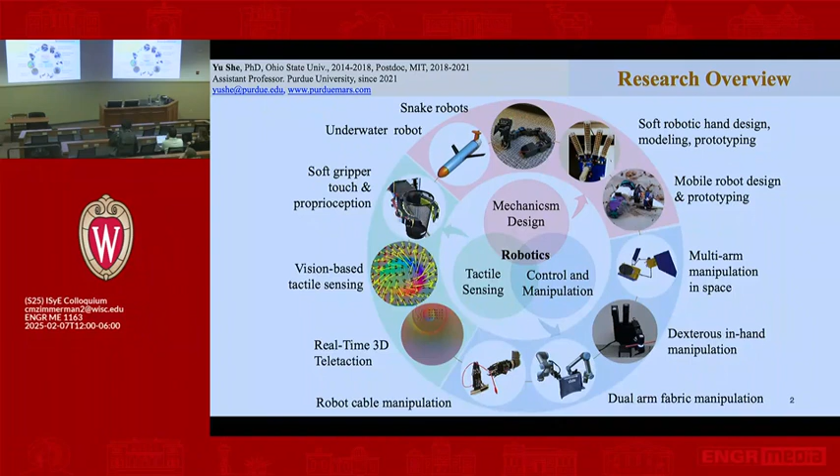The second direction is about tactile sensing. I'm going to introduce a very unique tactile sensor, quite different from traditional tactile sensors. It can generate very rich feedback from interactions with the environment. The last one: once we have the hardware design and the feedback, we can design controllers, motion planning, or machine learning policies for grasping and manipulation.

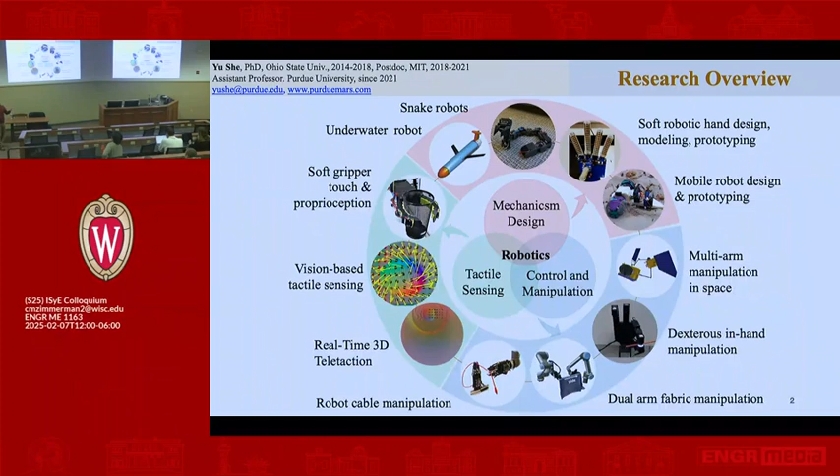So those are the three major research areas. Today I'm going to mostly focus on the second and the third one - tactile sensing and control for manipulation. It may be slightly different from traditional industrial engineering optimization, but it will be close to manufacturing or human factors for human-robot collaboration. So that's the high-level introduction.

You see all these industrial robots widely used to build cars like Tesla, even more than 10 years ago. They're fast, they can do repetitive tasks very efficiently. You see this everywhere. However, if you take a look at your home, we don't have too much robots there. You see robots doing floor cleaning, robots for the backyard doing grass mowing, and that's maybe the robots you see in daily life. It's not like an industrial manufacturing floor doing assembly everywhere, right?

So people work in this direction - we try to have robot assistants, robot waiters, home robots to help us. For example, I wish we had robots to help us do the laundry, prepare breakfast, lunch, do the housework. But we are not there yet. People work in this direction. Why are we not there? One major limitation or critical component we lack is this.

I'm thinking about robotic manipulation, because when we say we want robots in our daily life doing laundry, doing housework, there's a lot of physical interaction between the robotic hand and the environment for grasping, for control. That's something very different from the traditional setting of industrial robots. In the traditional setting, everything is known, you have a structured environment, and you know the components, objects, dimensions, and positions. But in daily life, all these things we don't know.

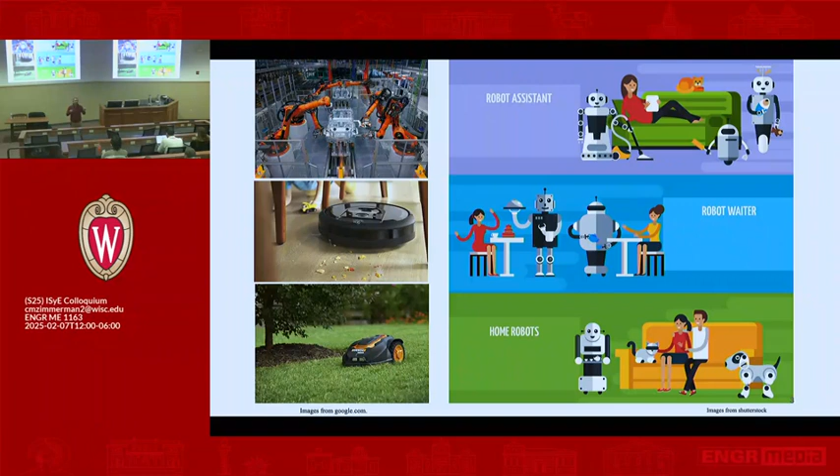There's a lot of dynamics and potentially soft material. In industrial robots, all the components are rigid, right? But in daily life we have deformable objects, like food, even just making breakfast. So all these things create these challenges. We think manipulation is one of the key bottlenecks to applying robots in daily life. Within this area, robotic manipulation, we think tactile sensing is critical because any manipulation task must have physical interaction between the robotic finger and the objects. So that's where we focus - my lab focuses on tactile sensing and robotic manipulation.

Here is an early demonstration from pioneer Johansson. This is a demo to show how tactile sensing is important. The participant on the left, everything is normal.

She can do this task, lighting a match, in a few seconds. On the right side, the same participant, same task, but now her hand and fingers get anesthesia. It's numb, she has no tactile feeling in her fingers. Eventually she still makes it, but it takes much longer, more than 30 seconds, to do the same task.

So we just want to show tactile sensing is really important in daily manipulation tasks. For example, tying your shoelace, buttoning your shirt, folding your clothes, doing a zip lock, making breakfast, or doing assembly tasks. All these things we need tactile sensing for.

And of course, people working in this field for a long time, these traditional tactile sensors have made significant progress in the past, say, 20 years. Piezo-based, capacitive-based, resistive-based tactile sensors - they're great, they've made big progress in the past decades. But they have some limitations as well.

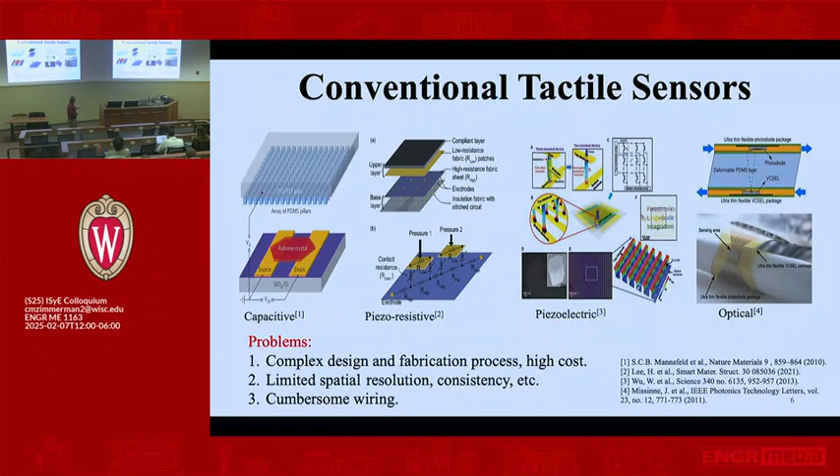They have a complex design for the fabrication process. They have limited spatial resolution. And you can imagine if you want, say, a 10 by 10 matrix, how many cables you need, right? You have a cumbersome wiring problem. So that's one kind of tactile sensor.

That's not the only category of tactile sensor. There's also what's called a vision-based tactile sensor. They are quite different from traditional tactile sensors. The idea is you have an embedded camera within the sensor. From the next slide, I'm going to explain how it works - it's quite different from traditional tactile sensors.

So first, we get a clear elastomer, silicone, and then we coat a reflective ink on the surface. It's just coating. Then if you press objects on the surface, it's going to deform the gel. And if you assemble the gel and the coating onto the robotic fingers, just assembling these components onto the fingers, it becomes a tactile sensor.

So that is how this vision-based tactile sensor works. Now, because we have embedded the camera within these sensors, we can tell the raw data from the image. You can imagine the difference, how rich the information we can get from this vision-based tactile sensor compared to traditional tactile sensors, which are resistive or capacitive-based and give you maybe one dimension or a few dimensions of data.

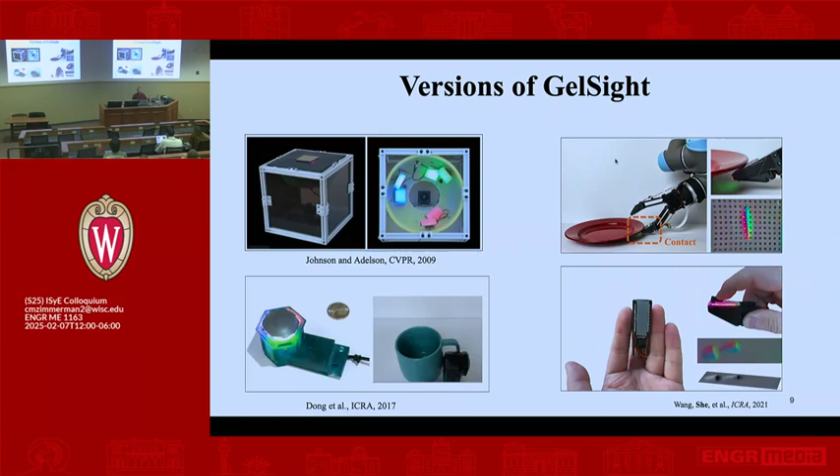Later on, my colleague Siyuan Dong made a smaller version. With this version, for the first time, they tried to install the sensor on the end effector of a robotic arm for grasping and manipulation. Still, it was kind of bulky and couldn't access small spaces. Then later I joined the team and we made it even smaller, finger-sized, and wedge-shaped, so it could access confined spaces - more appropriate for grasping and manipulation in a robotic system.

Now I just want to give you a visualization of what kind of tactile data we can get. Later on, I'm going to show you how we can use this tactile data for grasping and manipulation.

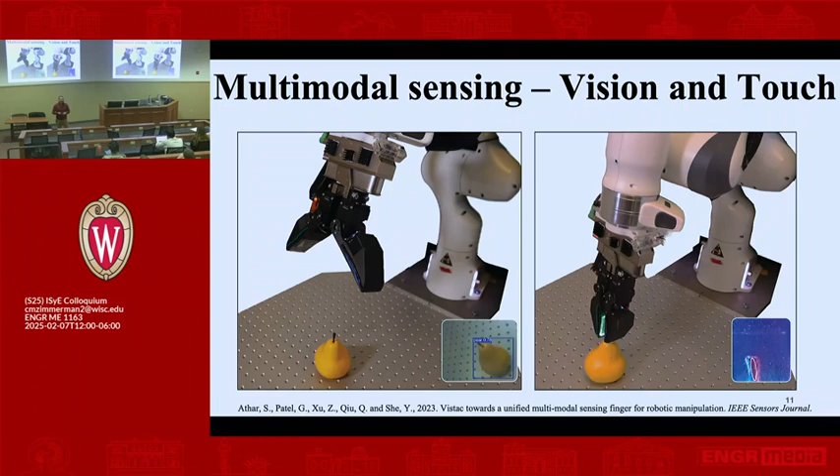We used something simple, the one-way window glass principle: the bright side acts as a mirror, and the dark side acts as a normal transparent window. In the daytime, the outside is lighter and the inside of the sensor is darker, so if you stand outside, you see the window like a mirror reflection. But if you stand inside, you see through it. In the evening it's vice versa. So basically you can change the lighting condition to change the mode, either tactile or vision. That's how we achieved this functionality.

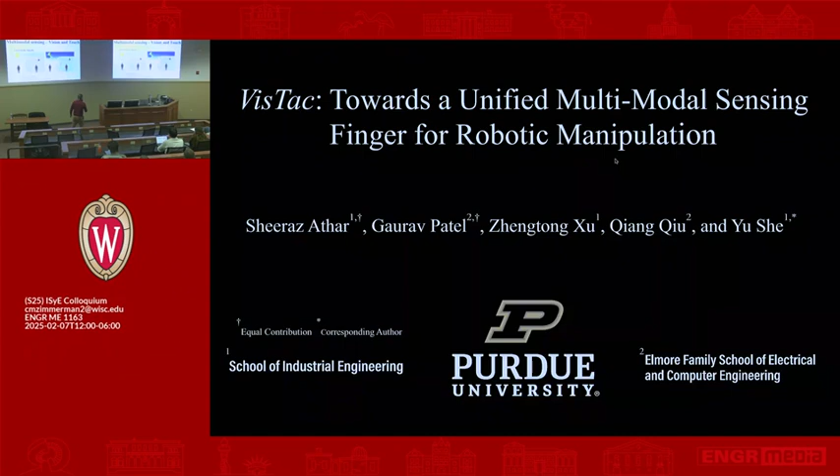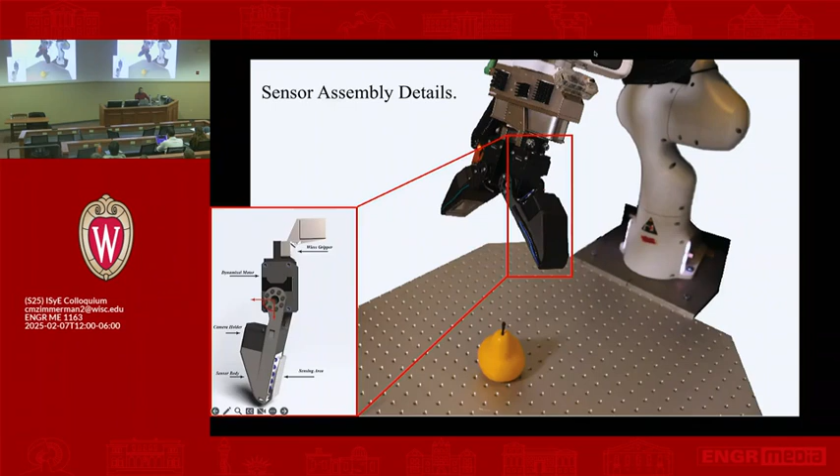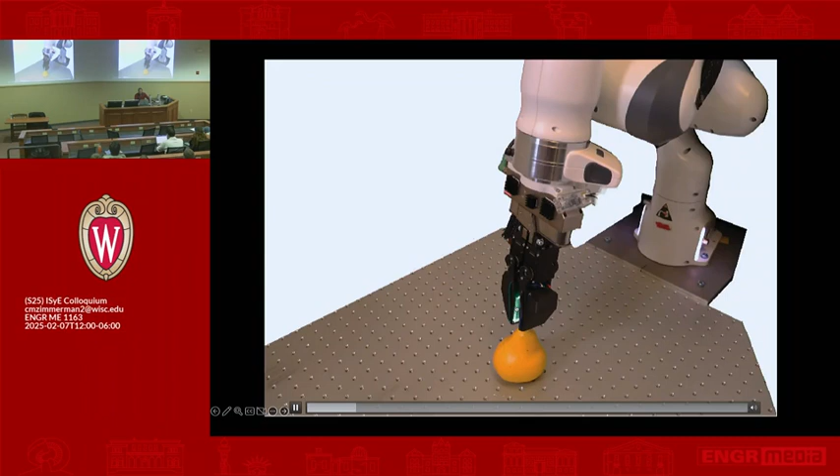I'll show a very quick demo here. We turn off the light, so the outside lighting is stronger than inside, and it's a vision modality, as you just saw. Now we change the lighting condition and turn the lights on. Now it becomes a tactile modality. So we just need to simply change the lighting condition to get either tactile or vision.

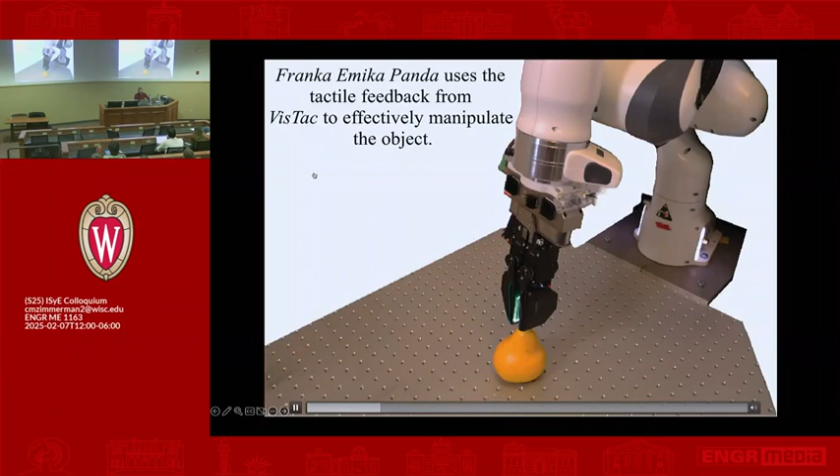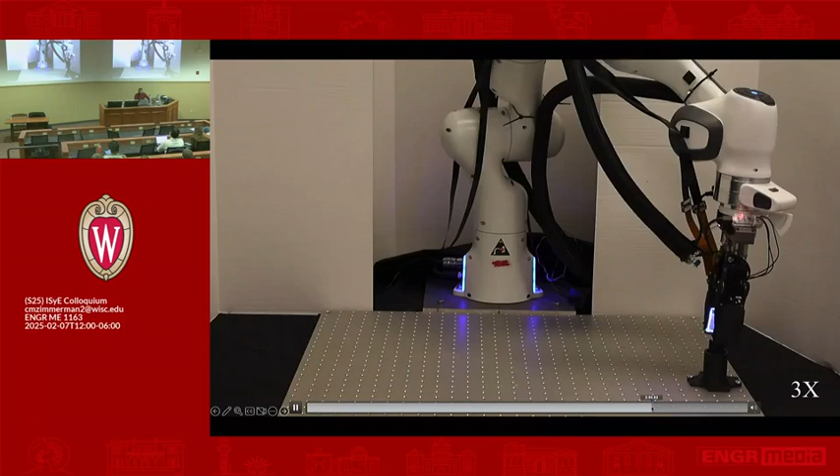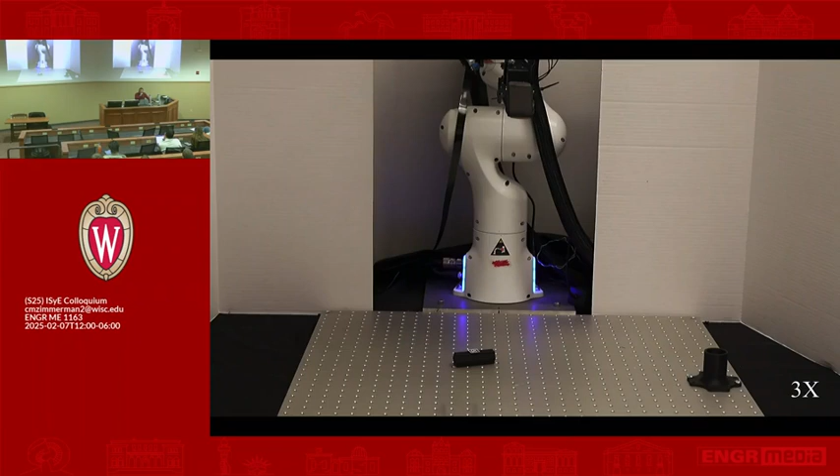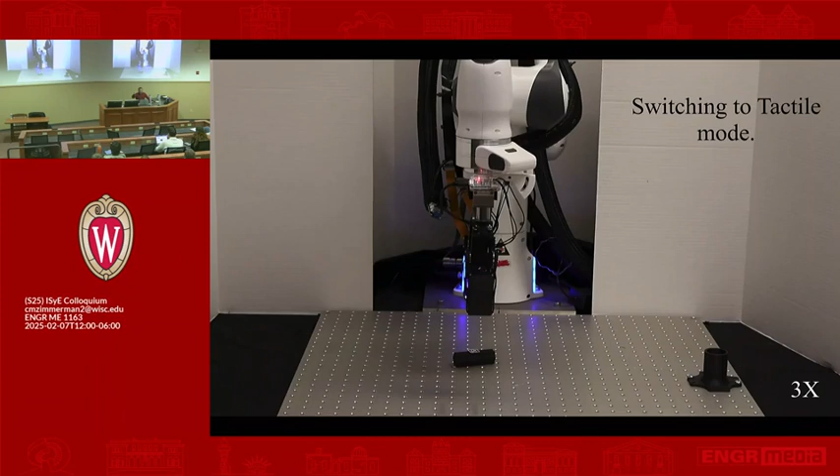Later on we have some demos to show some tasks where we use both tactile and vision to finish them. This is a peg-in-hole demonstration. We first use vision to identify the position and orientation of the objects on the table, and then we grasp the objects using vision modality to identify the object's position and orientation. Once we grasp the object in the hand, we switch to tactile modality, because tactile modality can tell you very precise orientation of the object in the finger, and then you can do the peg-in-hole insertion using this tactile feedback. That's one of the demos we showed earlier, combining both tactile and vision.

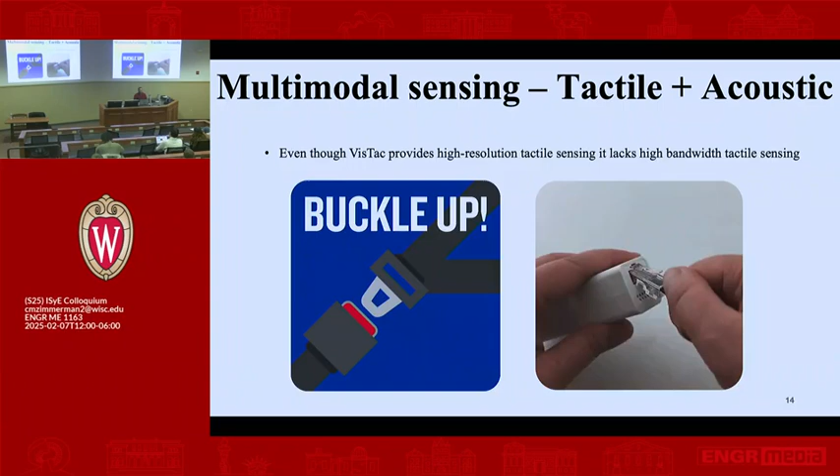This is the latest sensor we made. On the left side is still the traditional vision-based tactile sensor I showed you earlier — you press a key and see the tactile imprints. On the right side, we show the new added acoustic feedback. Basically we add an accelerometer and microphone on the finger, get the accelerometer information, and do a fast Fourier transformation to get spectral information. If you tap here, you see all this acoustic feedback.

Next we're going to show the pipeline, and later I'm going to show the demos where we combine these two modalities to perform some manipulation task. First, we have this robotic arm grasp a pen in the robotic finger, and this vision-based tactile information tells us the position and orientation of the pen in hand. Then we can do the alignment and insertion. At the end of the insertion, we hear a click sound from our acoustic feedback, and it tells us the mission is completed. So we combine these two pieces of information for the assembly task.

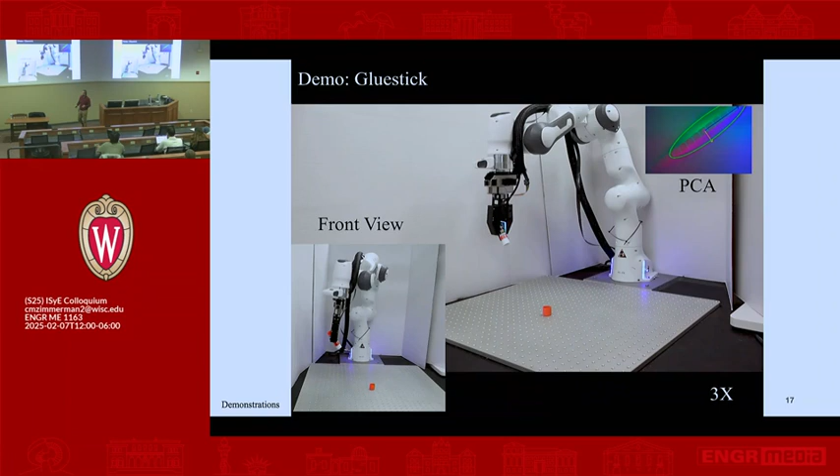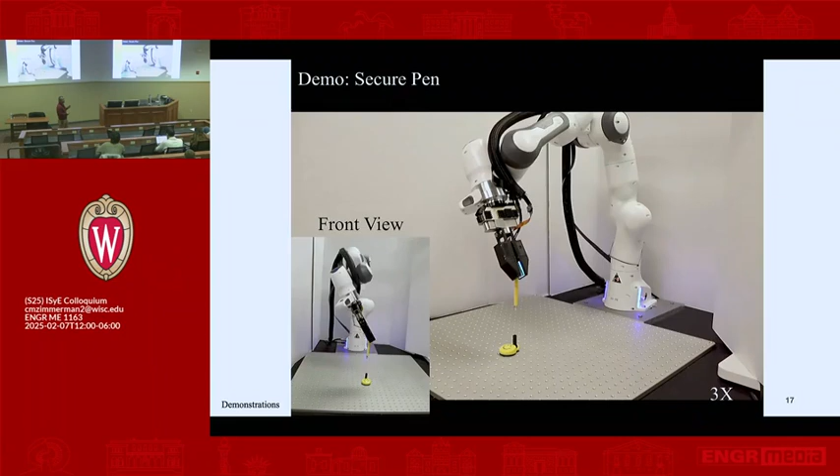This is a simple demo: first we use vision-based tactile information to do the position alignment and orientation alignment, then we do the insertion. At the end of the insertion, we hear a click sound, and it tells us mission completed. So: tactile, vision-based tactile, and then insertion.

Until now, everything I discussed is more about tactile feedback. Now I'm going to introduce how we make sense of this data for grasping and manipulation — the same question I raised earlier. You have very high dimension tactile data, a million pixels or 500,000 pixel data, very rich information. On the other side, for control, for robotic manipulation, you only have either one dimension or very low dimension. How can you bridge the gap? I'm going to introduce this, but you may think about it a little bit — how can we do that?

I'm going to present 3 ways to do that. First, we can extract the low dimension data from the high dimension data.

For example, we downsize the dimension. The original dimension for this image data is say 1 million, 500,000. However, for control, for manipulation, we don't need that high dimension. We just extract whatever we need. For example, for this cable manipulation task, we downsize the dimension from 500,000 to 3 dimensions.

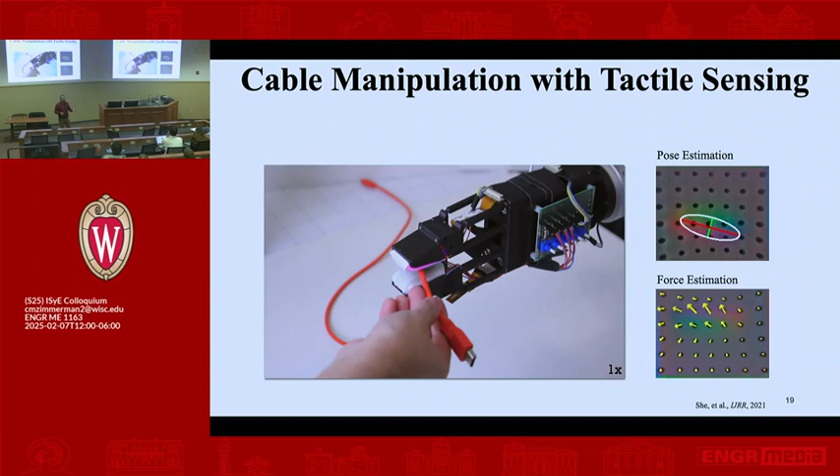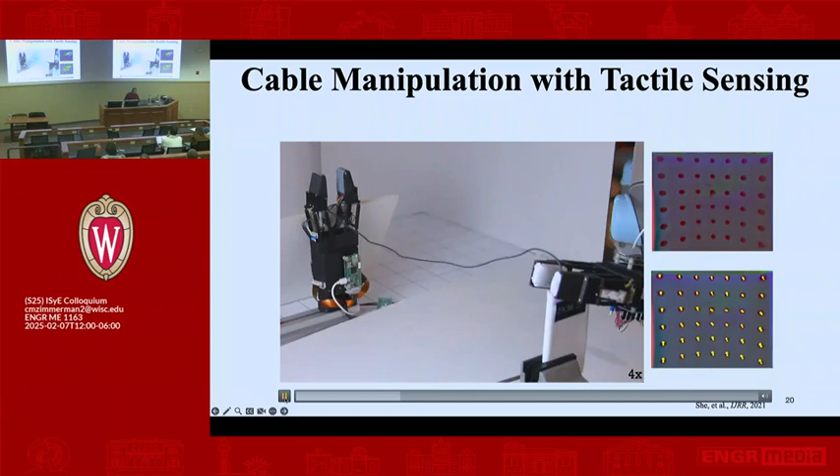We have some traditional low-level, low-dimension controls: PID control, LQR control, MPC, model predictive control. All of them are low dimension. Here's the automatic demonstration using this tactile data for insertion. Again, this is this demonstration for this task.

Using purely tactile data, we need to design two controllers, you can imagine. First, if we don't apply any controller, this cable easily falls out from the finger. You need two controllers. First, we need to move this gripper back and forth to prevent the cable from falling out, so that's one controller. Second, we want to make sure the gripping force is just right. It cannot be too large, cannot be too small.

If the gripping force is too large, there's too much friction and you cannot slide smoothly. If too little gripping force, then we don't have tactile feedback for control. So that's two controllers to regulate this robotic arm to move back and forth, and the gripping force, to make sure this cable manipulation is done smoothly. Again, this task is just following the cable, finding the end, and inserting to the cell phone using purely tactile data.

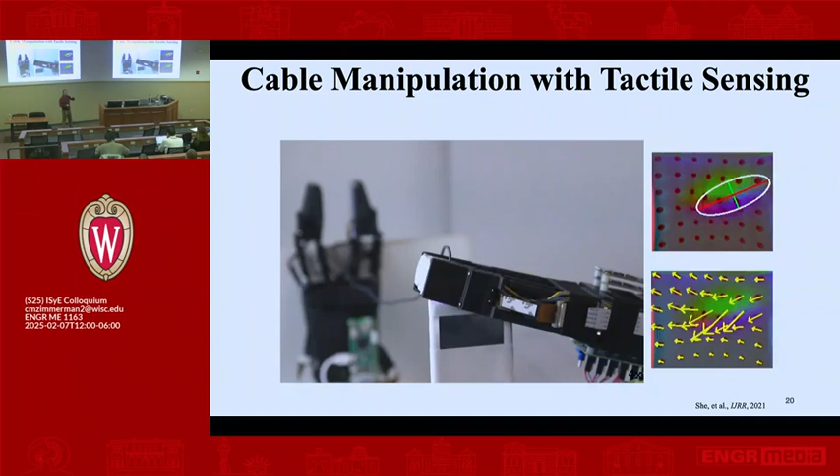That's one way how we can use this tactile data. I just mentioned that one way: we extract explicitly from the 500,000 dimension to 3 dimensions for traditional control manipulation. Now I'm going to introduce another way. This is a second method we can use to make sense of this tactile data.

Like the task we did earlier, here we can also use the same procedure as we did earlier for grasping, for manipulation. However, if we want to apply this grasping policy in our daily life, you can imagine that will be very difficult because we have different stiffness of objects, different shapes, different mechanical properties. I can design a PID control for the banana, but it doesn't necessarily work for the egg.

And I can design another PID control for the egg, but it doesn't necessarily work for the onion rings. You have different objects, I design different PID controls. It's okay, but many times you have a lot of objects you've never seen before. It's simply impossible to design infinite PID parameters for every single object, right? So that's how we find another solution.

We combine machine learning and model-based control to address this problem. This is what we do here. Again, this image input from tactile sensing has 500,000, 1 million pixels. We use machine learning, like an MLP, to extract the data into an implicit low-dimension representation.

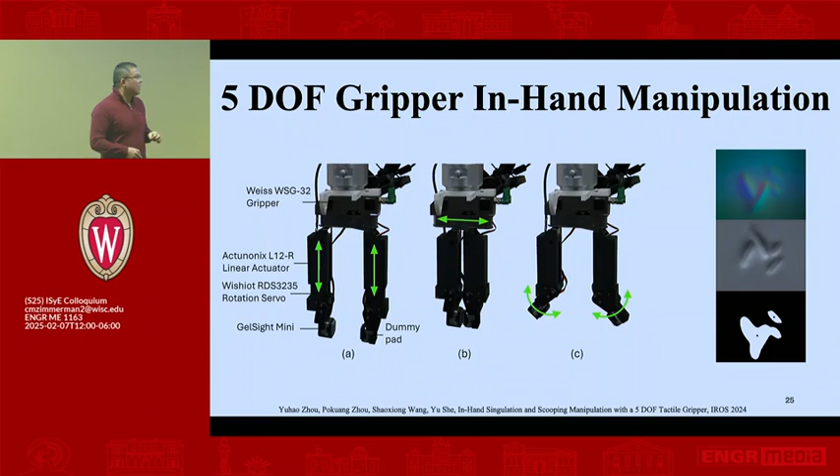Of course, my lab focused on this tactile sensor. We will install this tactile sensor at the fingertip. And later on, we're going to show you this high degree of freedom gripper can do some in-hand manipulation using this design here.

Here's the task we did. We have some objects buried within the granular material, and this red object is something we are interested in. But in the beginning, when we command this gripper to grasp the objects, in the beginning you saw all the tactile feedback is the granular material - there's no tactile feedback about the target object.

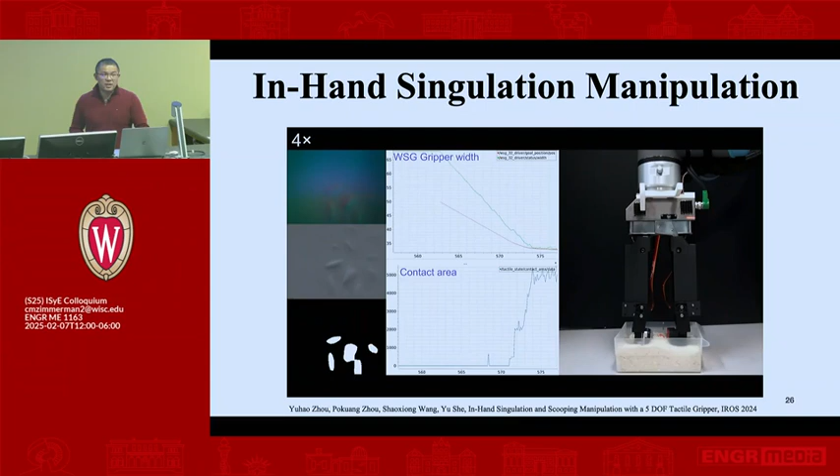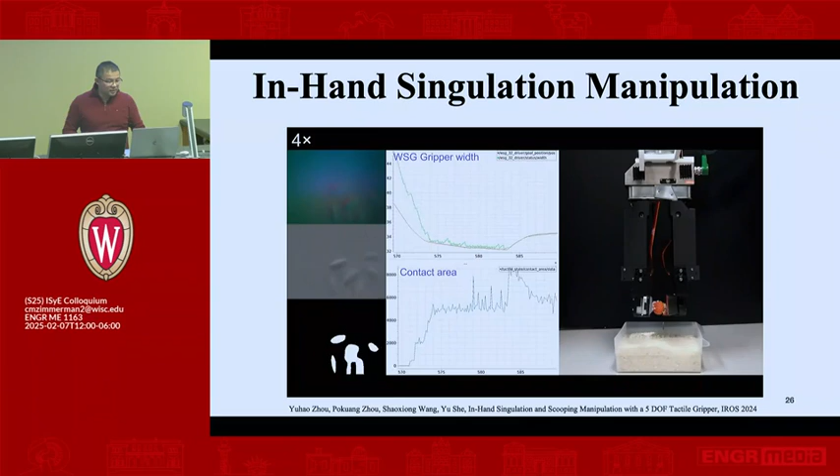So we need to do some in-hand manipulation to get rid of this granular material. Then we can get some good quality tactile feedback of the target object, right? So that's what we did here - we kind of squeeze a little bit to get rid of the rice. Yeah, we squeeze a little bit, get rid of the rice. Now we have tactile feedback for the target object.

Then we can do the classification based on the tactile feedback. We showed a little bit of different objects - manipulation, grasping, in-hand manipulation - and here is some data we get from 9 or 10 different objects.

We can also do this scoop manipulation because, for example, we want to insert this credit card into the credit card holder. We need to first grab this very thin credit card on the table, and then we can use this tactile feedback - once we grasp, you see there's a rotation in the finger, and then we can align based on the tactile feedback to insert the credit card into the credit card holder using tactile feedback. So this one kind of combines in-hand manipulation with the 5-degree-of-freedom gripper and tactile feedback for the alignment for the insertion.

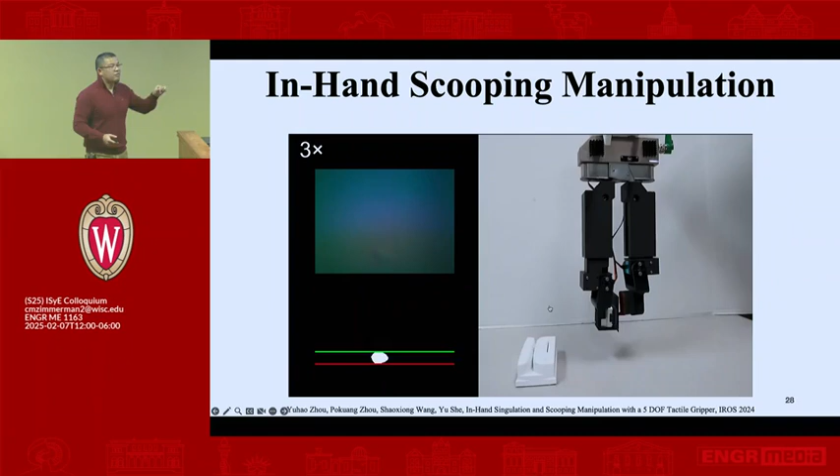We can also use this data for cable disentangling using the same framework I just presented earlier - the tactile feedback and the in-hand manipulation. So the only difference compared to this one and the earlier one is we add this additional degree of freedom for this robotic gripper, so it has more flexibility to do in-hand manipulation for this kind of manipulation task.

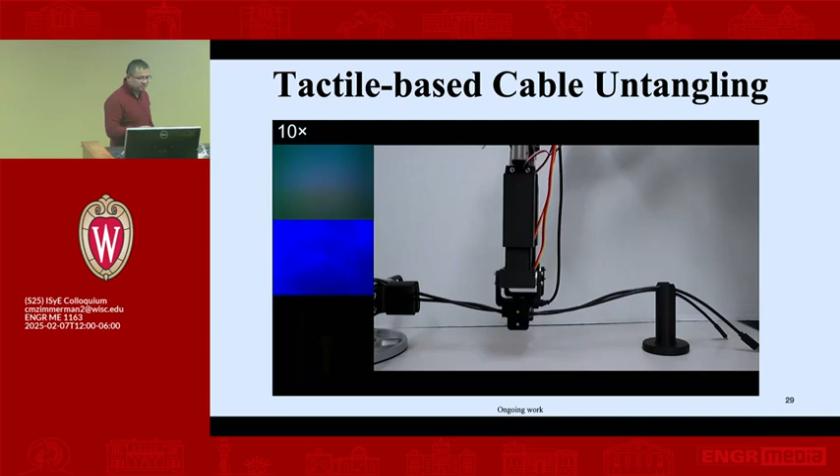Until now, everything we discussed is about static or quasi-static manipulation. Now we're going to introduce another one: dynamic manipulation. And here is the third method I mentioned.

The first method, we downgrade the 500,000-dimensional tactile sensor data to 3 dimensions. We can design a controller - LQR, MPC, PID - for control. Second method, we combine machine learning and model-based control, because we know how to formulate the grasping problem as a mathematical formulation. We can combine this together.

Now, for a little bit more complex task, dynamic manipulation, we actually don't know how to formulate it as a mathematical representation. So we just use machine learning here for dynamic manipulation. In this way, we can use the raw image data, raw tactile data - very high dimension, a lot of computing - but at least it can do the task, right? That's the 3 ways we make sense of this data.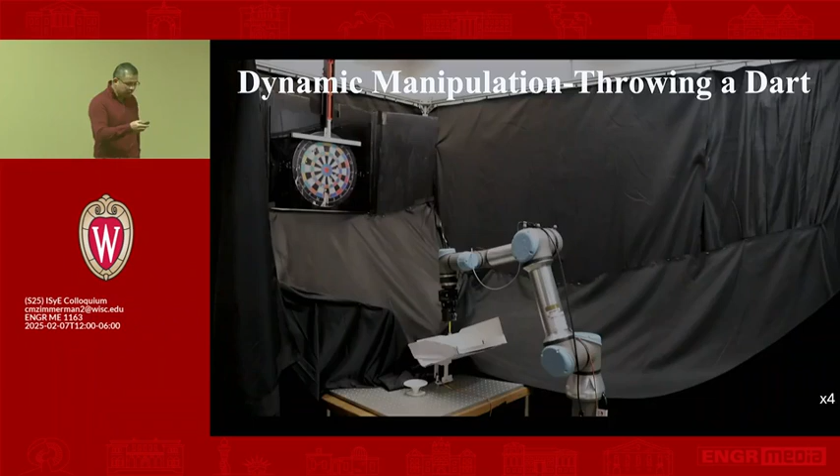So this is the data collection. The observation for this pipeline, we grasp this dart. We actually go and shake it a little bit, tilt it a little bit, and we see all this tactile information during this shaking or tilting. Actually, this information is very important because it encodes the mechanical property from our tactile sensor, for example the mass distribution. All this data can be captured by this raw image data.

So later on we use this data, and of course we have this action. Action here has 2 parts. One is the depth position we're grasping the dart at, which is one of the action parameters. Another is the orientation of the dart within the gripper. We have the observation, we have the action, then we can train a reinforcement learning policy to do this task.

One thing I want to mention is this: because we have this new tactile sensor that can capture the physical property of the objects, that means later on, if I give a new dart never seen before, I grasp this dart and can estimate the physical property. Then I can generate the action accordingly to throw the dart. Even if this dart has properties I've never seen before - it could be heavier, longer, different - we can capture that from our tactile sensor, and then generate the action accordingly.

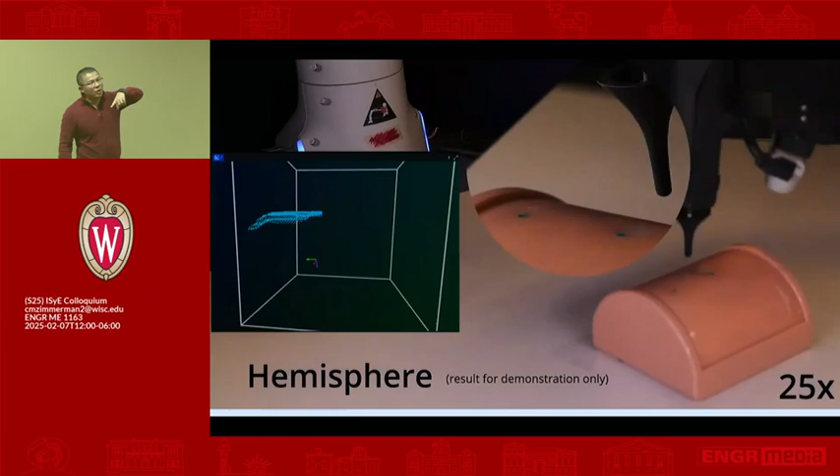There's a short video here. There are two things we introduce here. First, impedance control - we must adjust appropriate contact force on the skin. Second, we have some motion planning algorithm to make it more efficient, to only explore the area of interest. And there are three pieces of information we can get from here.

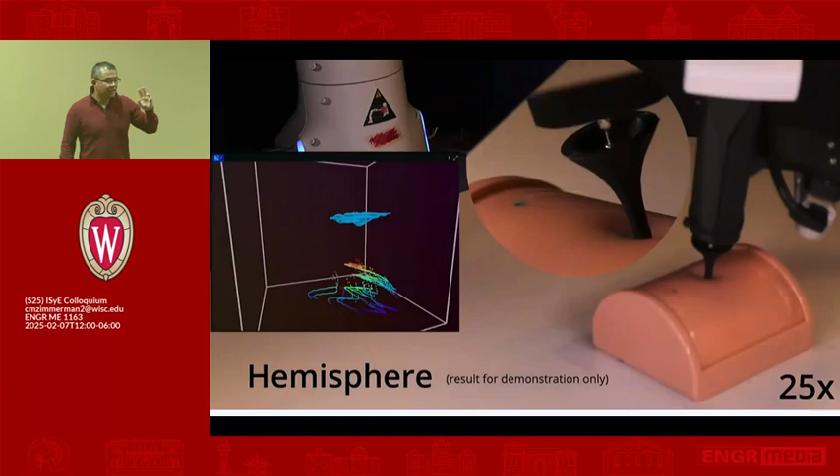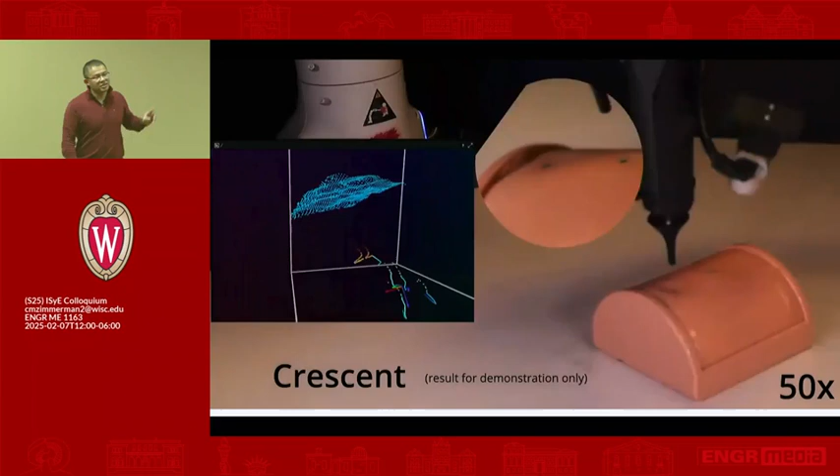First, whether or not there's a tumor underneath the skin - we can do that. Second, if we have that information, can we localize and reconstruct the shape of the object? And we did it here - we can do the 3D reconstruction. We can reconstruct the shape and size of objects underneath the skin that cannot be seen by cameras or human vision.

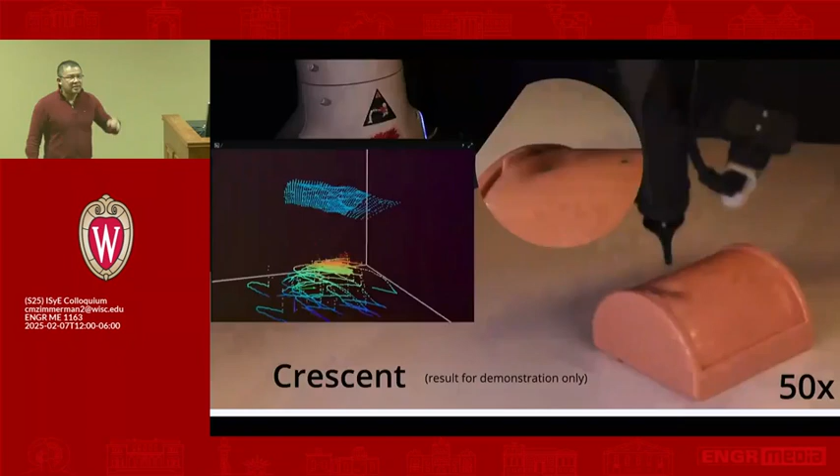The third task, which we didn't show here, is some of the latest results: we can also estimate the physical property of the tumor underneath the skin - the stiffness, hardness, and viscosity. We assume this mechanical property may correspond to the stage of the tumor - early, middle, or late stage. Maybe the stiffness and viscosity will be different, right? At least now we know the stiffness, we know the hardness. It could help formulate a mapping to the stage of the tumor.

We also have different applications in addition to the task I showed earlier. Oh, that's one task I forgot to mention.

We have some latest results I didn't present here, but I think it's important to mention. This is a 3D reconstruction of the tactile information.

We actually have recent work to physically reconstruct the physical shape. For example, imagine we have robots on Mars doing teleoperation. We not only can get tactile information from the sensor, we can also reconstruct the geometry that we can feel, that a human can feel. I can reconstruct the physical information for this tactile data. If anyone is interested in that direction, I'm happy to chat later.

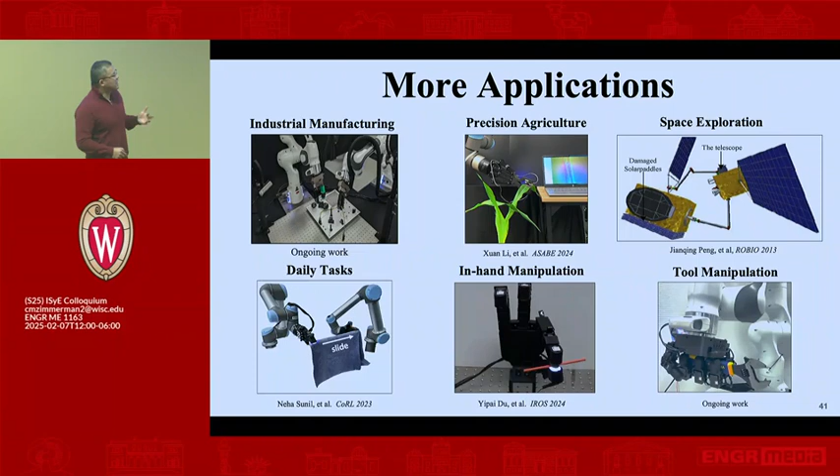We can do different applications for industrial assembly - gear assembly, belt assembly, cable assembly. This is the NIST assembly board, which we have in the lab. We have a lot of agriculture applications using this tactile sensor and the motion planning algorithm I showed earlier. We can do dual arm manipulation coordination. We have some early work on deformable object manipulation, like cable and fabric manipulation and folding. We also have in-hand manipulation and power grasping for manipulation.

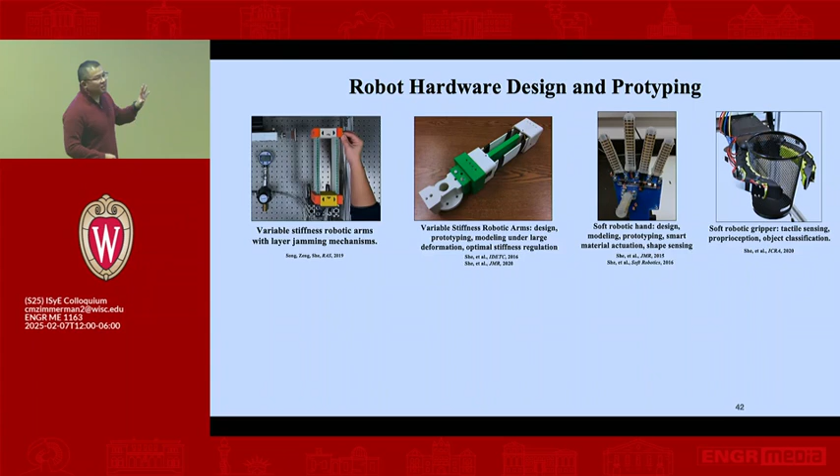Those slides I presented until now are more about tactile sensing and manipulation. I also briefly mentioned some hardware design work - this is built from scratch. We build a 3D design with 3D printing and laser cutting, then assemble and test it. These are some hardware mechanical systems we also made before, though I didn't present them too much today.

But that's basically all the slides I prepared. I'm happy to take any questions you may have. Yeah, thank you.

So I have a question - probably I'll ask first. In your raw data, what is the format of your raw data from these tactile sensors? I saw that there are some alignments like these arrows, right? And you also mentioned there are some colors reflecting other information - what are those? So I get the second part...

Can you say the first part? I have the microphone here - I got the second part of the question, but what was the first part? Can you remind me? So I see from the raw data you have these multiple arrows to denote the alignment, or relative location. And another thing is we have these different colors, right? So what are these data? And it seems their resolutions are different, right? Yes, exactly.

The yellow arrows represent the shear force or tangential force. The resolution, of course, is different from the image data, the RGB data. These arrows are generated by marker tracking, and these markers - we can customize the dimension. Here I think we presented like a 10 by 14 arrow array, but it depends on what you need. For our application, this is good enough for grasping and manipulation. If we need higher density, we can also do that.